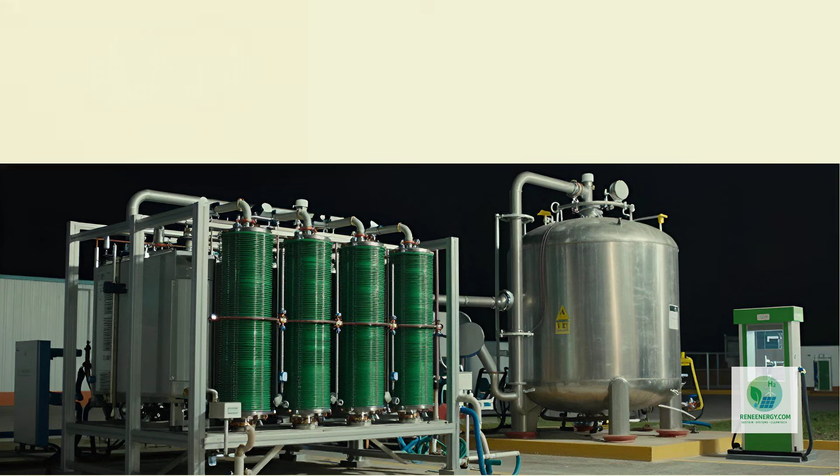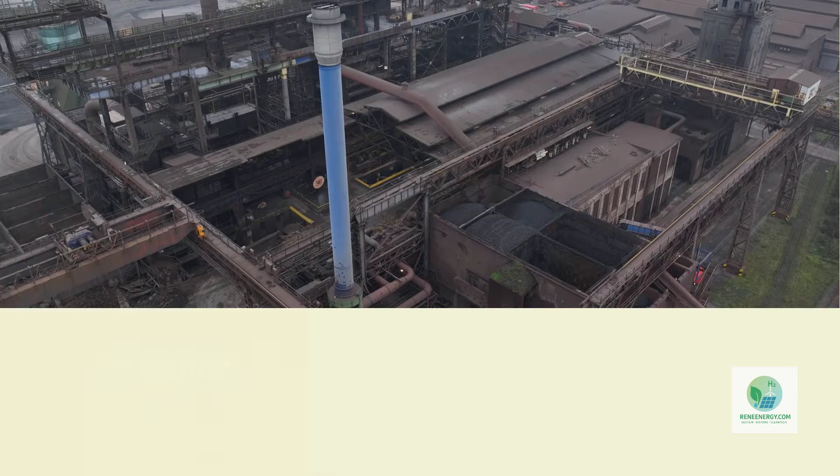Imagine waking up tomorrow and discovering that a completely new energy system has already started forming beneath the surface of the global economy. Factories are quietly installing massive machines that split water into hydrogen using renewable electricity. Industrial gas companies are expanding networks of pipelines, liquefaction plants, and storage facilities designed to move hydrogen across continents. Governments are writing regulations and subsidies around a molecule that could reshape heavy industry, shipping, fertilizer production, and global energy trade. Behind all of this activity are a handful of companies that most people rarely think about, yet they are building the foundations of what many analysts believe could become one of the most important industrial transformations of the 21st century: the green hydrogen economy.

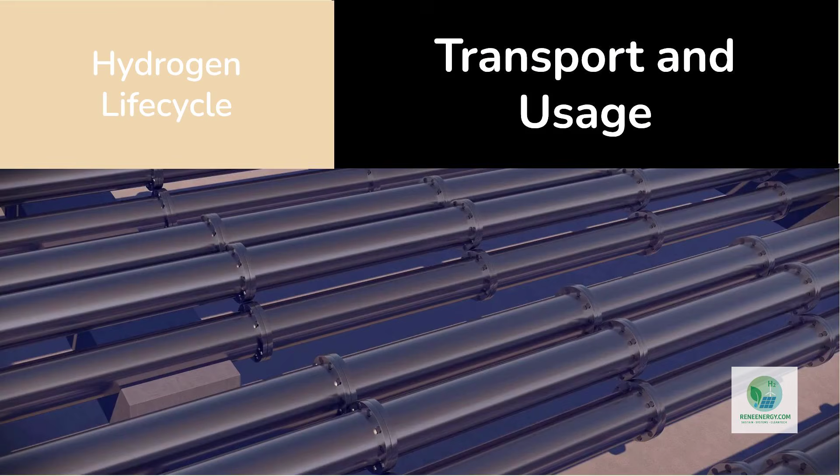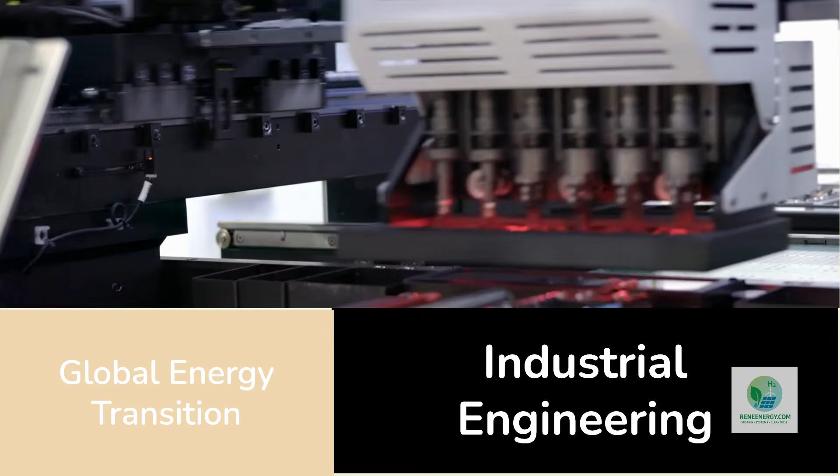Green hydrogen is often described as a simple idea: use renewable electricity from solar, wind, or hydropower to run electrolyzers, machines that split water molecules into hydrogen and oxygen. Capture the hydrogen, compress or liquefy it, transport it through pipelines or tankers, and then use it as a fuel or industrial feedstock. But in reality, building a functioning green hydrogen economy is far more complicated than installing electrolyzers. It requires entire systems of infrastructure: electricity supply, water treatment, electrolyzer manufacturing, hydrogen compression, storage tanks, liquefaction facilities, transportation networks, fueling stations, and industrial customers capable of using hydrogen instead of fossil fuels. Creating all of these systems simultaneously is one of the most complex industrial engineering challenges currently underway in the global energy transition.

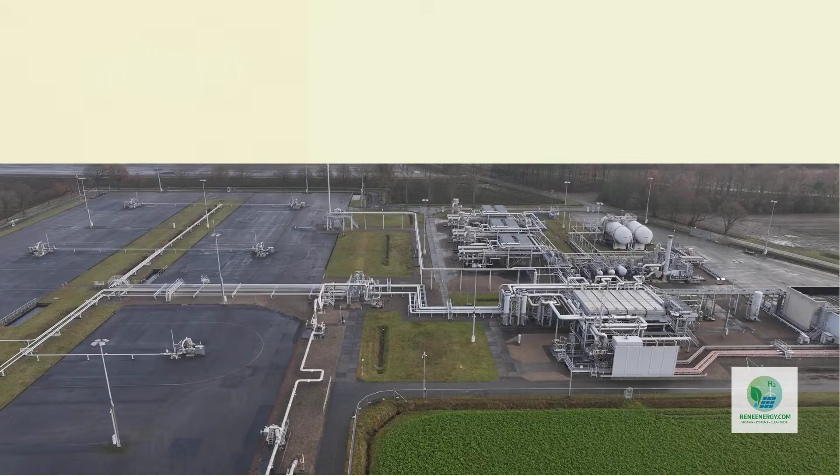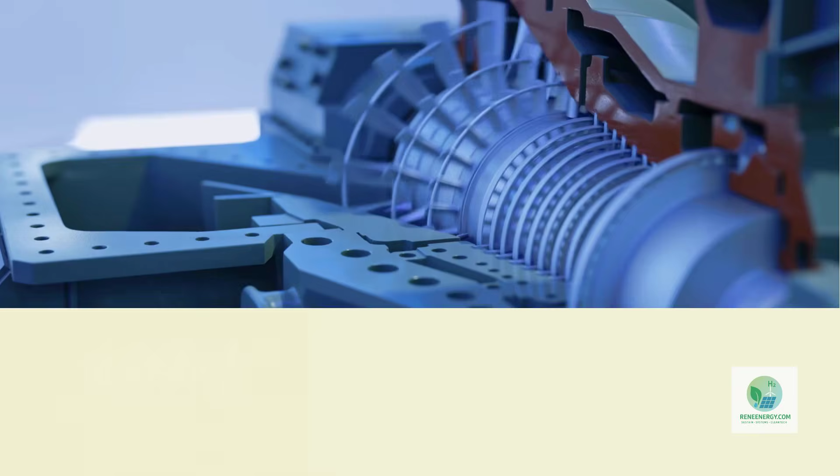The companies building this new hydrogen infrastructure do not all look the same. Some specialize in the machines that produce hydrogen. Others dominate the industrial gas networks that distribute it. Some are developing massive hydrogen production plants powered by renewable electricity, while others focus on transportation systems that move hydrogen from one region to another. When you look closely, you begin to see a layered industrial ecosystem forming around hydrogen technology, and at the center of this ecosystem are several companies whose strategies reveal how the green hydrogen economy might actually emerge.

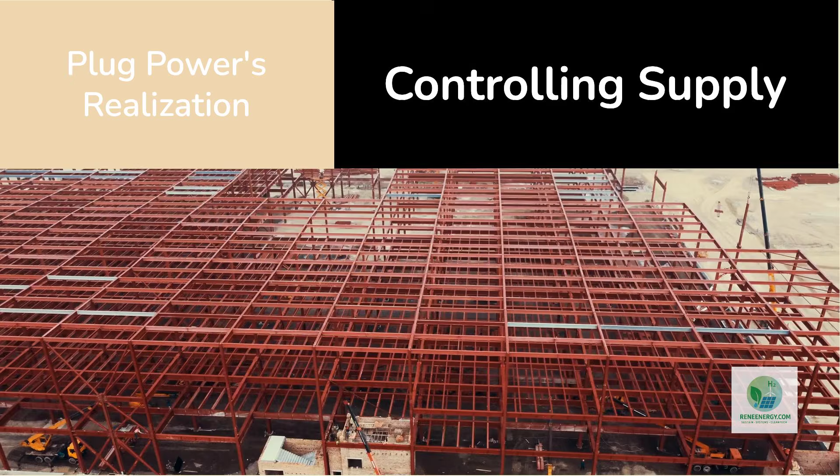One of the most recognizable players is Plug Power. Plug Power began its journey not by producing hydrogen, but by building fuel cells designed to power forklifts and warehouses. These fuel cells allowed companies like Walmart and Amazon to replace battery-powered forklifts with hydrogen-powered systems that could refuel quickly and operate continuously. Over time, Plug Power realized that controlling hydrogen supply was just as important as building the fuel cells themselves. That realization led the company to pursue an ambitious strategy: constructing a vertically integrated green hydrogen network that includes electrolyzer manufacturing, hydrogen production plants, liquefaction facilities, distribution logistics, and fueling stations. Instead of simply selling equipment, Plug Power is attempting to build an entire hydrogen ecosystem that connects renewable electricity to industrial customers across the United States.

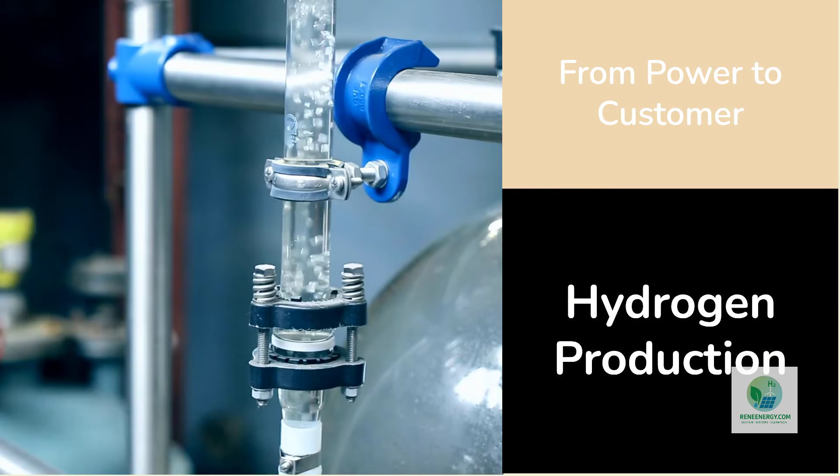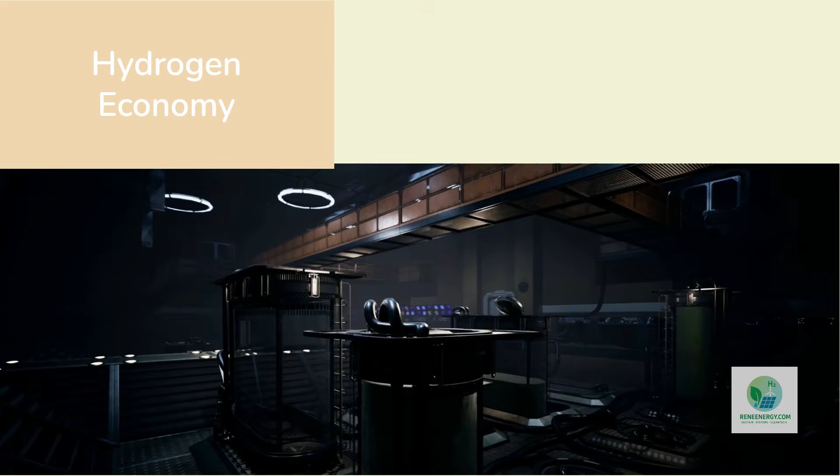The scale of this ambition is enormous. Plug Power has invested billions of dollars in hydrogen production plants located in regions with abundant renewable electricity. These plants use electrolyzers to convert renewable power into hydrogen, which is then liquefied and transported by tanker trucks to customers. The company's long-term vision involves creating a network of hydrogen hubs capable of supplying large industrial users, transportation fleets, and distribution centers. If this network works as intended, Plug Power would not just be a technology provider. It would become one of the core infrastructure operators of the hydrogen economy.

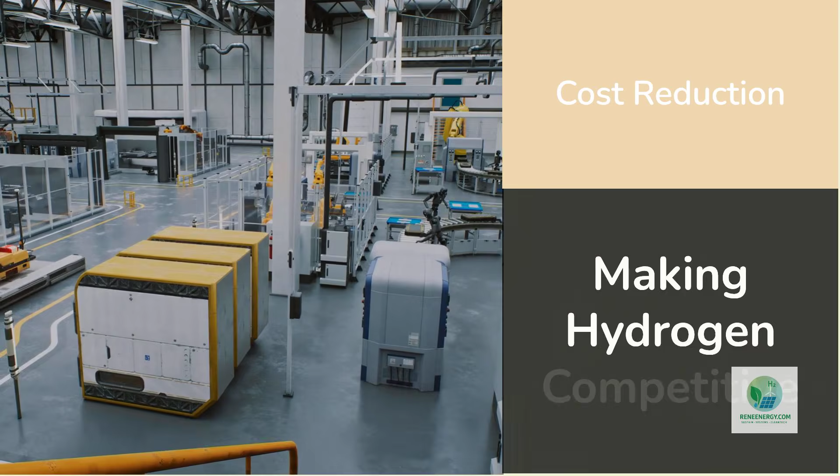But Plug Power is not the only company building the machines that produce hydrogen. Another key player is Nel ASA. Nel specializes in electrolyzers, the industrial systems that perform the electrolysis process itself. These machines are the heart of any hydrogen production facility. Nel has spent decades refining both alkaline electrolyzer technology and newer proton exchange membrane electrolyzers designed to operate efficiently with fluctuating renewable power. The company's strategy focuses on scaling manufacturing capacity, so electrolyzers can be produced at industrial volumes rather than small custom installations. By expanding factory production lines, Nel aims to drive down the cost of electrolyzers, which remains one of the biggest barriers to making green hydrogen competitive with hydrogen produced from natural gas.

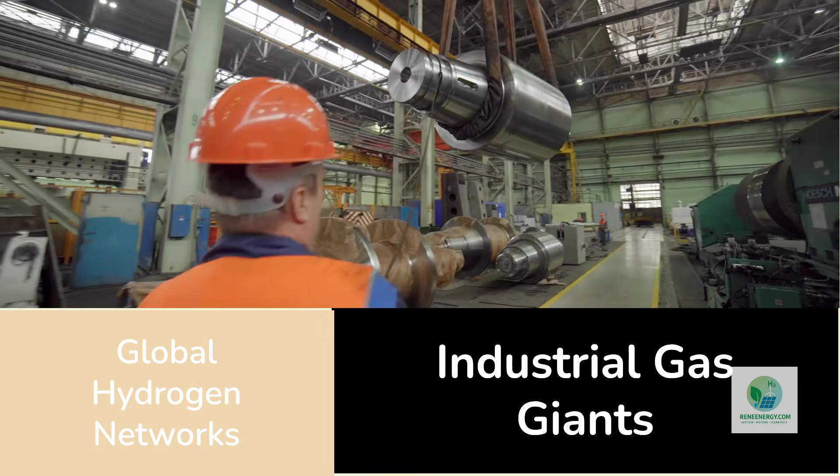Another powerful force in the hydrogen industry comes from companies that have been producing industrial gases for more than a century. Firms like Air Liquide and Linde already operate enormous networks that produce, transport, and supply gases such as oxygen, nitrogen, and hydrogen to industries around the world. Long before green hydrogen became a political priority, these companies were building pipelines, storage facilities, and liquefaction plants designed to deliver hydrogen to refineries, chemical plants, and semiconductor factories. Today, they are applying that experience to the emerging green hydrogen market. For companies like Air Liquide and Linde, hydrogen is not just a futuristic energy carrier.

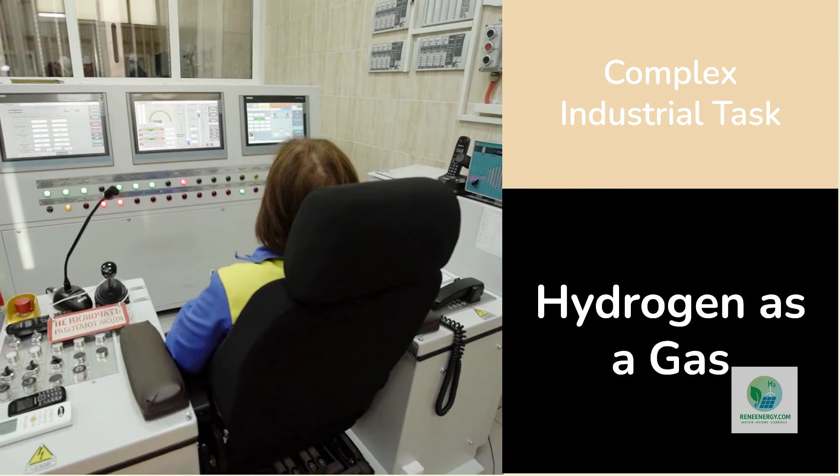It is a gas that must be managed with extremely sophisticated industrial infrastructure. Hydrogen molecules are tiny and prone to leakage. They require specialized compression equipment, cryogenic storage tanks, and pipelines designed to handle high pressures and low temperatures. Transporting hydrogen safely and efficiently is an engineering challenge that few companies in the world have mastered. That is precisely why industrial gas companies are so influential in the hydrogen economy. They possess decades of operational expertise in handling hydrogen at industrial scale.

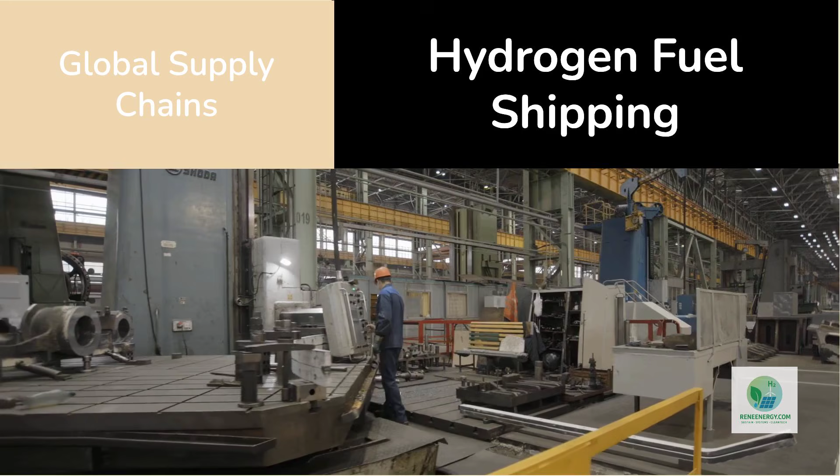Another company making massive investments in hydrogen infrastructure is Air Products. Air Products is developing some of the largest hydrogen projects ever proposed, including multi-billion-dollar facilities designed to produce hydrogen from renewable electricity and convert it into ammonia for export. These projects aim to create global supply chains in which hydrogen-rich fuels can be shipped from regions with abundant renewable energy to industrial markets that need low-carbon fuels. If these projects succeed, hydrogen could become a globally traded commodity similar to liquefied natural gas.

Technology providers are also playing an essential role in the hydrogen economy. Companies like Siemens Energy are developing advanced electrolyzer systems designed to integrate with renewable electricity grids. Siemens Energy has invested heavily in large-scale electrolyzer factories capable of producing gigawatts of hydrogen production equipment each year. The goal is to industrialize hydrogen technology so that hydrogen plants can be deployed rapidly as renewable electricity expands.

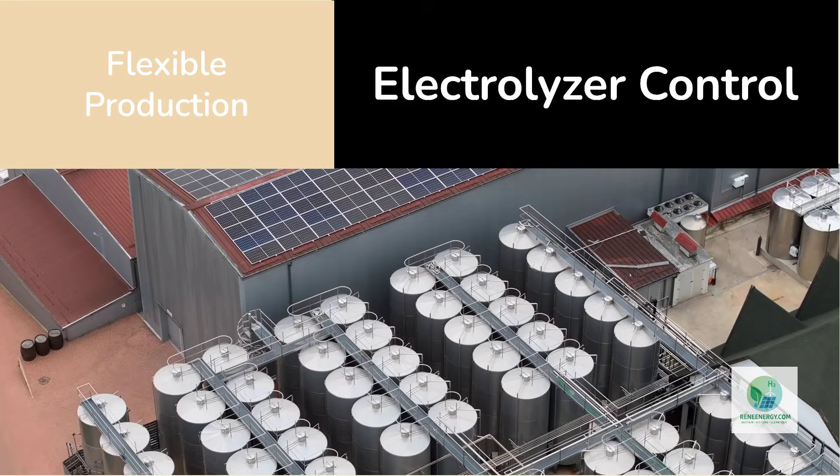Meanwhile, companies such as ITM Power focus on proton exchange membrane electrolyzers optimized for dynamic operation with wind and solar power. Renewable electricity is inherently variable, and hydrogen systems must be capable of adjusting production levels in response to changing electricity supply. Advanced electrolyzer technologies allow hydrogen plants to ramp production up or down, depending on renewable generation, turning hydrogen production into a flexible load for electricity grids.

When you look at these companies collectively, an interesting pattern emerges. Each one controls a different piece of the hydrogen value chain. Some build the machines that produce hydrogen. Others manage the infrastructure that transports and stores it. Some specialize in fuel cells that convert hydrogen into electricity, while others develop massive industrial projects that supply hydrogen to chemical plants, steel mills, or transportation fleets. No single company controls the entire hydrogen system. Instead, the emerging hydrogen economy resembles a network of interconnected industrial capabilities.

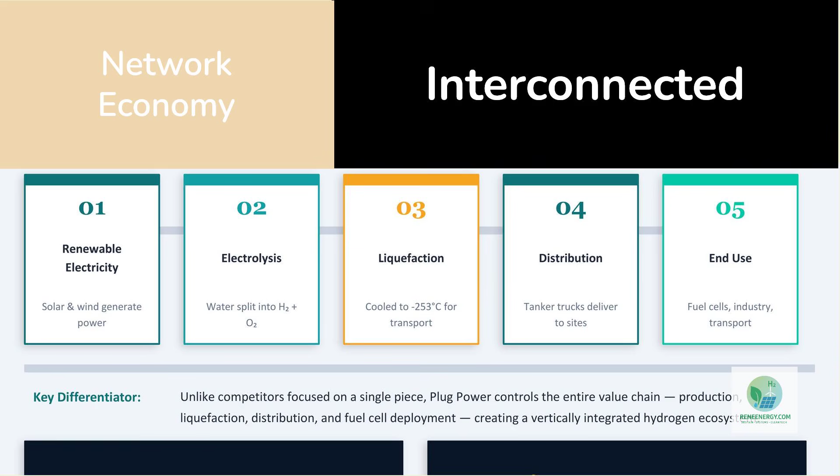This network structure reveals something important about how large energy transitions actually occur. New energy systems rarely emerge from a single breakthrough technology. Instead, they arise when multiple industries simultaneously adapt their capabilities to support a new fuel or energy carrier. The green hydrogen economy is developing in precisely this way.

Renewable electricity producers provide the power required for electrolysis. Electrolyzer manufacturers build the machines that generate hydrogen. Industrial gas companies handle storage and distribution. Engineering firms design the plants and pipelines. And industrial customers adopt hydrogen as a feedstock or fuel. The result is a slowly expanding ecosystem that connects electricity systems, industrial manufacturing, transportation networks, and global commodity markets.

If this ecosystem continues to grow, hydrogen could eventually play a central role in decarbonizing sectors that are extremely difficult to electrify directly. Steel production, fertilizer manufacturing, shipping fuels, aviation fuels, and heavy industrial heat all represent potential markets for hydrogen-based energy carriers. Yet the success of this vision is far from guaranteed.

Hydrogen remains expensive compared with fossil fuels in many applications. Electrolyzers require large amounts of electricity, and renewable power infrastructure must expand dramatically to supply that energy. Hydrogen storage and transportation systems are complex and capital-intensive. Building a fully functional hydrogen economy could take decades and trillions of dollars in investment.

This uncertainty is precisely what makes the strategies of hydrogen companies so fascinating to observe. Firms like Plug Power are betting that early investments in infrastructure will position them as dominant suppliers once hydrogen demand begins to scale. Electrolyzer manufacturers like Nel and ITM Power are racing to reduce equipment costs through industrial manufacturing. Industrial gas companies such as Air Liquide, Linde, and Air Products are leveraging their operational expertise to build hydrogen supply networks capable of supporting entire industrial clusters.

Each of these companies is effectively placing a strategic bet on the same long-term outcome: that hydrogen will become a major component of the future global energy system. If they are correct, the infrastructure being built today could form the backbone of a multi-trillion-dollar hydrogen economy. If they are wrong, billions of dollars in industrial investments could struggle to find profitable markets.

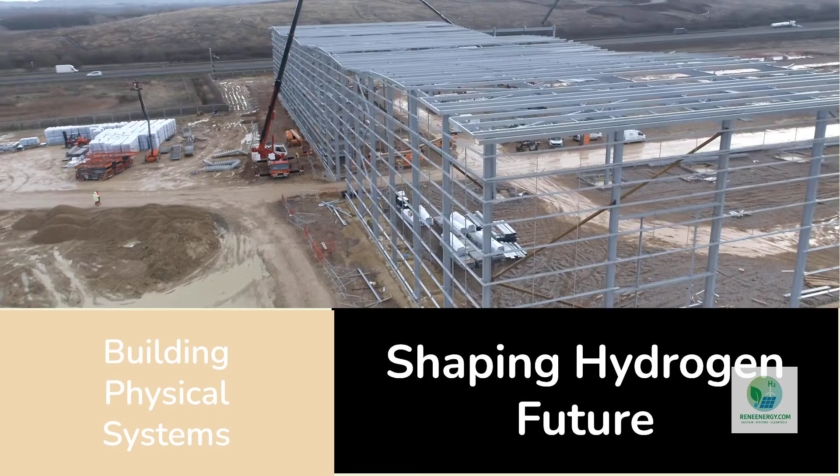From a systems perspective, what we are witnessing today is not merely the rise of a new fuel. It is the early construction of an entirely new industrial architecture connecting renewable electricity, chemical engineering, global logistics, and heavy industry. The companies involved in this transformation are not just developing technologies. They are building the physical systems that could determine how hydrogen moves through the global economy for decades to come.

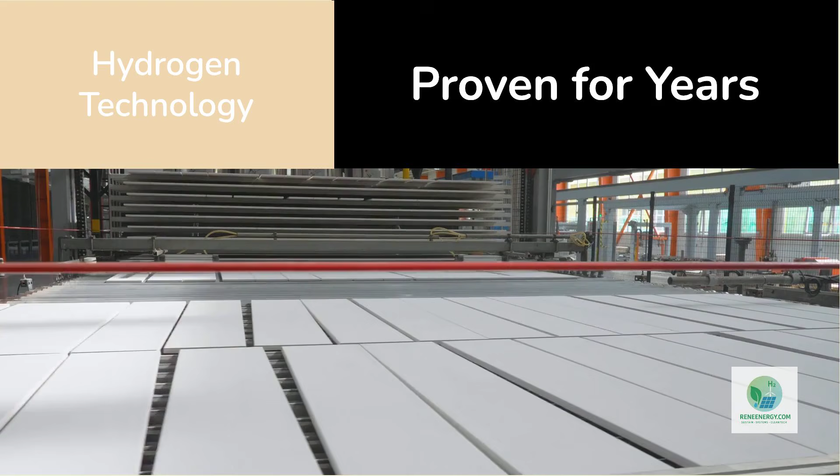The question now is not whether hydrogen technology works. Electrolyzers, pipelines, liquefaction plants, and fuel cells have existed for years. The real question is whether all of these systems can be integrated into a coherent network that operates reliably and economically at massive scale. That integration challenge will ultimately determine whether the companies building the green hydrogen economy today are laying the foundations of a new industrial era or simply constructing the most ambitious energy experiment of the modern age.